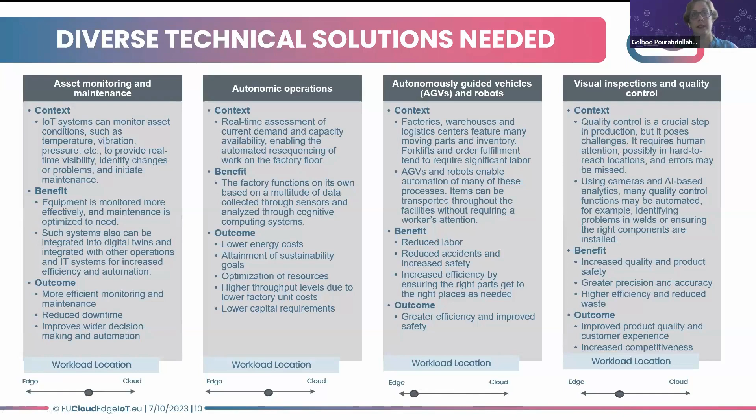So really, it's a matter of use case how the workload will be distributed, and what could be the benefits that this distribution would bring to the end users.

So if I want to go very quickly, because I don't have much time, to what's the final message, what's the way forward to go with: IoT and edge use cases are still really at the beginning, at very small scales. According to the results of the survey that we did, less than 25% of companies that are already using these technologies are using them at a larger scale. So you can see that really the potential is there, but there is still much work needed in order to implement these solutions at a larger scale.

Then, like any other technologies, there are top barriers for adoption of Cloud Edge IoT. One of the most important ones is the lack of adequate IT infrastructure. We are talking about computing continuum, but honestly, if we go into the detail of it, we are still not clear what is the adequate IT infrastructure that we need to implement the CEI use cases.

Security is still a big concern. Cost of deployment is a huge concern for many companies, especially when we go to the edge. And another one is lack of skills—this is also very relevant. From another perspective, current solutions are really complex, costly, and slow. In most cases, the technologies related to these solutions are not mature. And from the ecosystem perspective, the ecosystem is still very fragmented and evolving.

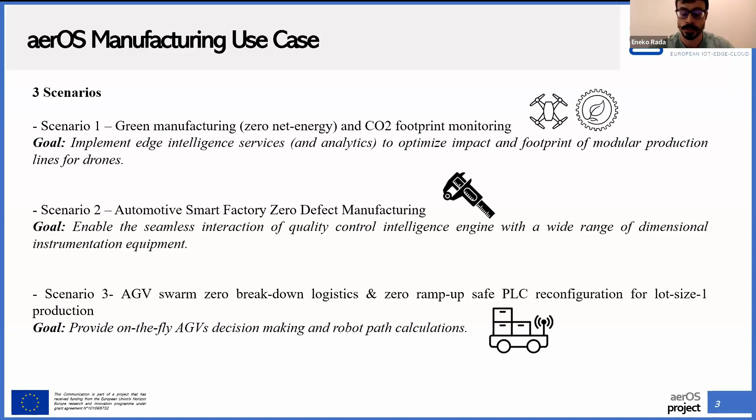The third scenario is related with autonomous guided vehicles. Actually, we have in the room Maria, who is responsible for this scenario. Maybe she will later give more detail on this, but this will provide on-the-fly AGV decision making and robot path calculation. This will allow, of course, a more dynamic production line as well, because the AGVs will be more adaptive depending on what we need at each moment on a production line.

Now going through the second scenario, the visual inspection and quality control use case. The idea here is to implement AerOs capabilities for the dimensional measurement process of physical components. Here we have a CMM, a coordinate measurement machine, that will allow us to read the dimensions of any piece by laser, and will provide us a complete overview of the dimensions of a piece, and also to analyze all the data related with the machine, the production, and the piece.

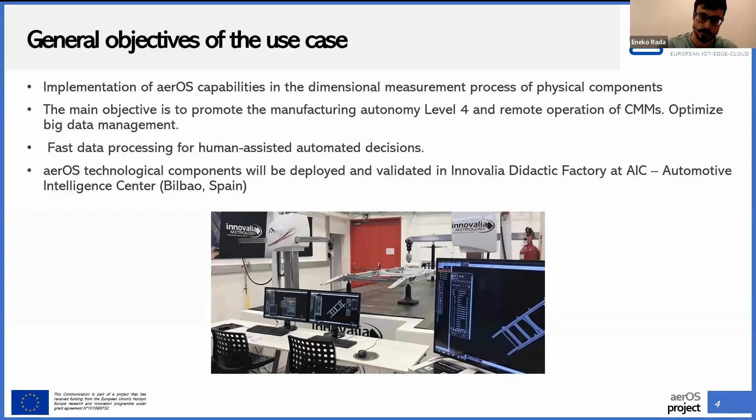So here the main objectives are to promote manufacturing autonomy level 4 and remote operations of CMMs. Of course, AerOs will allow us to have fast data processing and human-assisted automated decisions. With this we mean that maybe we have to change some production steps in order to change some dimensions of a specific piece. These use cases will be run in the Innovalia Didactic Factory at the Automotive Intelligence Center, located in Bilbao, Spain.

Now, what is the main challenge of this specific scenario? As you can imagine, currently in production lines we have a lot of dimensional data related with different pieces. The pieces are more and more complex, and we have more and more quantity of pieces. So if you mix everything into one problem, nowadays we have a lot of data sets in less time to analyze. Just to give you an example, for a car door we will have 15 million points per piece. So this involves high accuracy 3D point clouds of any product.

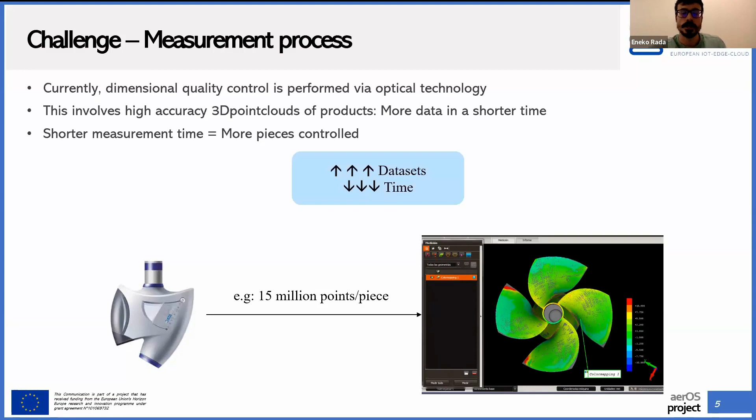So as you can see here, we have more and more data to be analyzed in less time in a production line. So in the next slides, I will present the process as it is at this moment, what process we have currently, and what we envision for AerOs when it's implemented in these use cases.

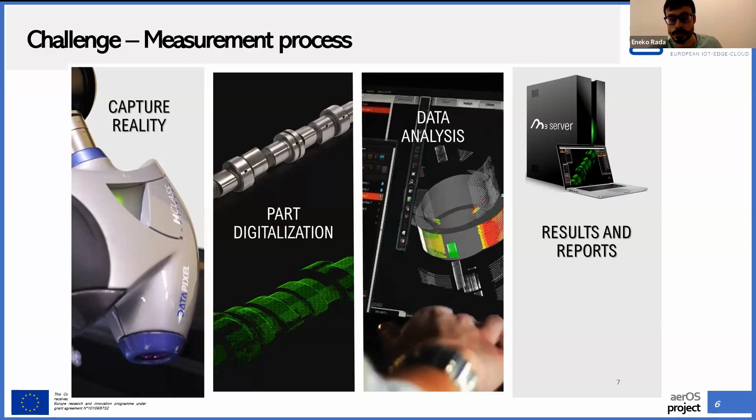In the dimensional quality inspection process, we have 4 main steps. I will give further detail on each of them, but at a general level, we have the capture of point clouds of a piece. We have the digitalization, or it could be a digital twin generation of a piece. Data analysis: we can compare the real dimensions of a piece with what dimensions it should have depending on the tolerances we have for each product. And finally, the analytics, the results and reports of each of these pieces. So in this scheme, you can see the traditional method for the realization of a measurement.

Okay, so as you can see here, the first step will be to take the CAD file of the part to be measured. And in this step, we analyze the dimensions and the tolerances to be measured and identify which machine and technology is the best to do the measurement, because we have different sensors, different machines, and this has to be selected. Okay, so this is the first step.

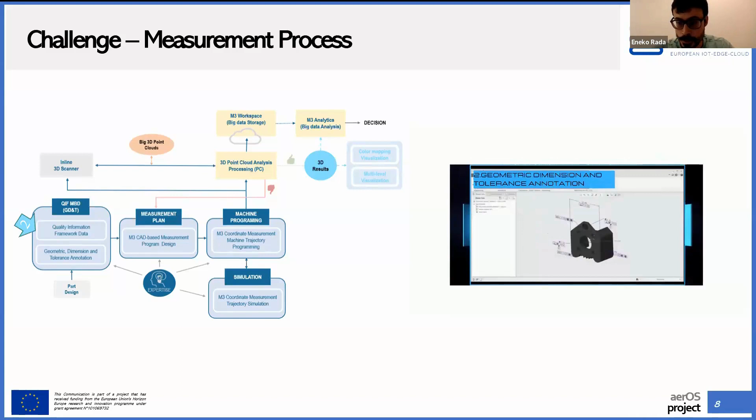Okay, now the second step. This is more related with the definition of the geometry and dimension. So here we define the geometry, dimension, tolerances, and create the quality information framework. These steps consist on transferring the dimensional information from the CAD file to the software, which is called the M3 software design program. So as you can see in the video, we have to include this information manually at this moment. Okay, here we are including information.

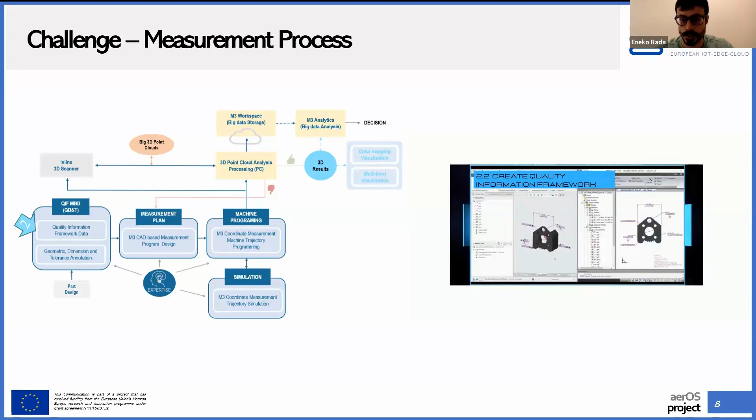Perfect. Now, the third step here is to define a measurement plan. This is based on the definition of the points of a piece to be measured. This depends, of course, on the experience of the metrologists, but we have to choose here as well the external conditions under which the measurement is done. For example, we can choose what light conditions we have at this moment, because this will affect the measurement, and we have to choose the exposure time for the scan or the scan density, of course. In the video, you can see here that in the software we introduce those parameters, the density, the light conditions, and so on.

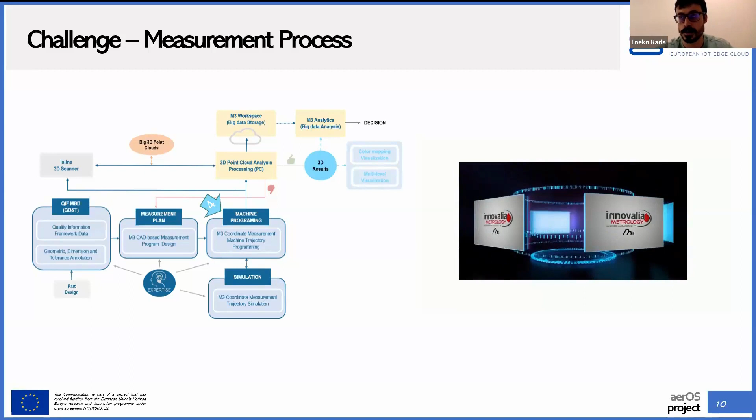Now, if we go to the fourth step, this consists on defining the machine trajectory. Here we tell the machine what steps we need to carry out in order to have a successful dimension measurement. The fifth point is the simulation. Here we simulate the trajectory of the machine that depends on the previously added parameters. Okay.

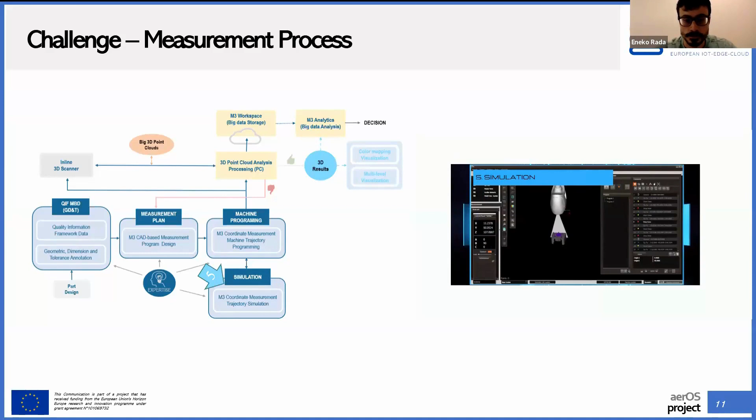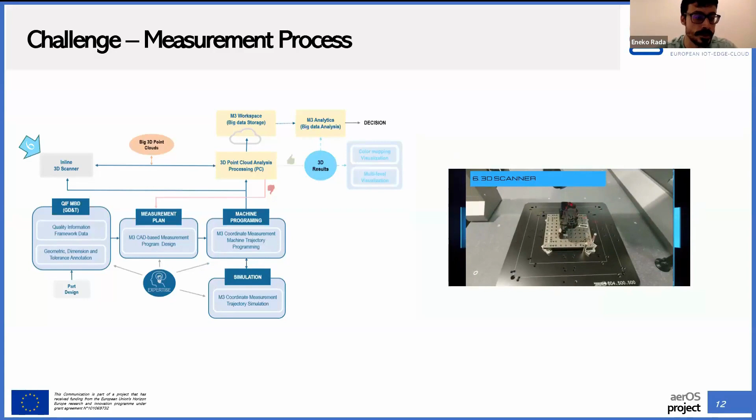The sixth point, we do the measurement itself. Here we run the measurement on the piece, as you can see here, and here we will obtain the point cloud that afterwards will be analyzed in the software. Okay. Finally, point 7 is to analyze all the data set that has been generated. Here we may have a problem because sometimes if the selected variables that were chosen in the measurement plan are not the right ones, we could get big errors in the measurement, and all the previous process must be repeated. So as you can see here, we have on one side a quite manual process, and on the other side very heavy data volumes for the software to analyze.

So what challenges do we have here? We need experienced metrologists. It is a time-consuming process, and we have increasingly big data volumes, 3D point clouds, and a lot of production lines, different pieces. If you go to modular production line trends, we will get more and more data. So this is a very big challenge.

But what opportunities do we have with the implementation of aerOS? Here we will have the ability to include specific and fast applications in the edge in order to automate and assist the process for the metrologist. Of course, we can even include some artificial intelligence applications in the edge in order to get optimized measurement plans. And all of this could be with low latency or even real-time operation.

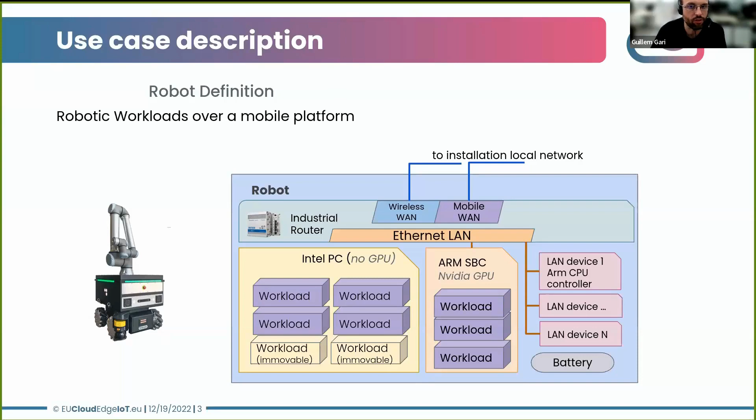We have several devices inside the robot, and we have some workloads, pieces of software, that are intrinsically related to the robot and cannot be moved away, and some other workloads that can be moved away. We also have several devices like CPU and industrial router, wireless or mobile connectivity, and different kinds of sensors connected to the LAN. And very important, we have a battery powered device, so energy consumption is important for us in order to increase productivity.

So what are our locations in the computing continuum, the cloud edge continuum? For example, in our use case, the servers will be on Robotnik facilities, the cloud will be in the traditional cloud providers, and each warehouse where the robots transport goods from point A to point B will be a different location. Each location will be independent, but they are connected to the internet.

Well, we have several robots. In order to manage several robots, we need some kind of software that usually runs on the edge and manages the different robots in order to optimize the work, the transportation of goods or the missions. What are the communications between the robot and the fleet management system? The robots give it their status, what they are doing, and the fleet management system will ask a robot to do a mission. Its job is to find the optimal robot for the assigned mission, so it will search for the ideal one.